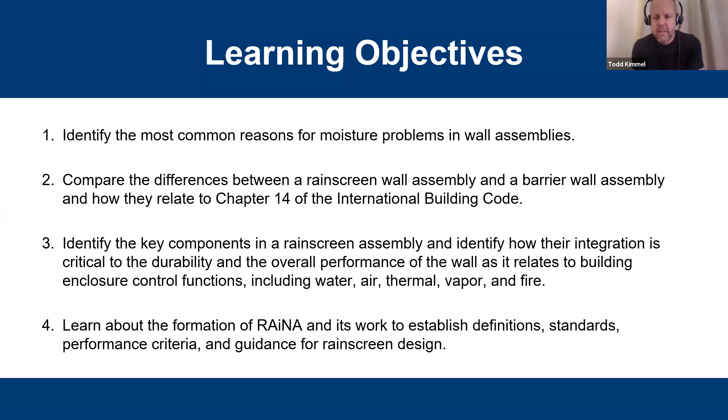So, just quickly, here's the course description. The hope and the goal here is to identify some of the common reasons for moisture issues within our wall assemblies, look at what's currently in the code as it relates to the various elements and components that we have to consider within rainscreen walls, and look at the overall performance of walls as it relates to the various functions from air, water, vapor, thermal, and fire. And then, learn a little bit more about the new association out there, how we can support your efforts and how it might make sense to align going forward.

So we'll start with the building enclosure. We'll look at all the things that we need to consider when it comes to rainscreen, which, as we hopefully know, is more than just a paneling product. There's a lot of other considerations that we need to take in—why it makes sense that the rainscreen group needs to come together to represent this kind of new gold standard within the enclosure environment, and how the Rainscreen Association works.

So I am going to ask the Chief Operating Officer for RAiNA, Laverne Dalgleish, I believe, is in attendance today, and he should be able to assist with answering any questions that you have throughout the course of the presentation. So feel free to type questions within the chat box. If we're unable to answer any of those particular questions, I'll certainly be able to field them at the end of today's program, and we'll hopefully get what you need before the end.

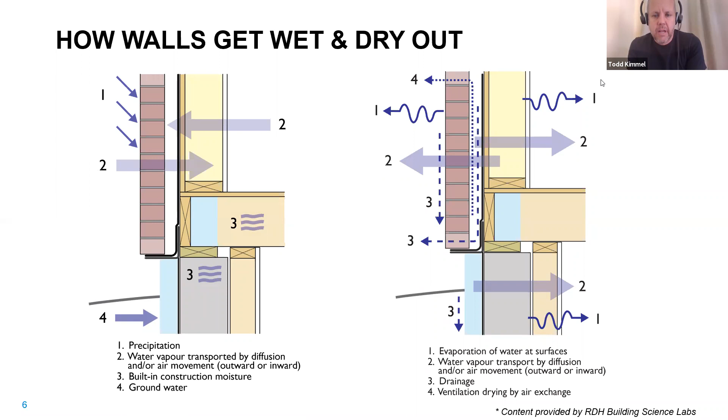So that's not always used in all assemblies. We'll talk about how that certainly integrates within the rainscreen wall.

When it comes to managing liquid water in our walls, we have 3 approaches for that in general. First, we'll start with what we would call a storage or a mass wall. These are built walls where the structure itself is built out of fairly resilient materials when it comes to moisture, whether that's rubble or masonry or sometimes composite layered assemblies.

These types of materials are meant to be that water break right on the surface. Sometimes they can take on water, but it wouldn't be to the detriment of those materials, and they will eventually release that water without compromise to the integrity of the building. We don't see a tremendous amount of storage or mass walls now that we have energy code requirements—certain assemblies are moving away from that, but this is certainly a way to manage liquid water within our built environment.

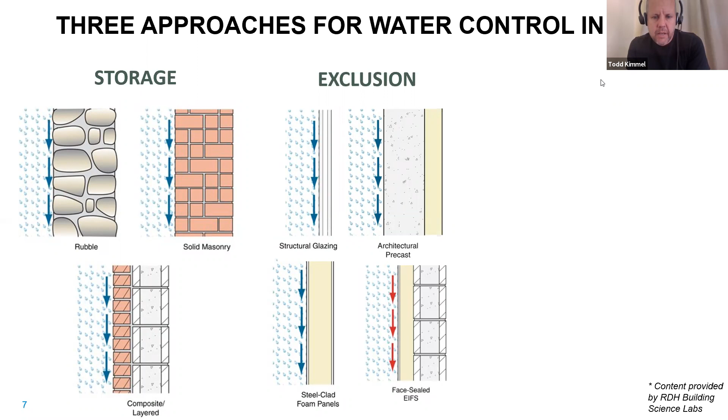We also have exclusion walls. Not too different from that mass wall, but these types of walls are not taking on moisture, and they're really meant to be perfect. They're navigating the water on the exterior side, and they have a primary location where that liquid water can hit and drain to the bottom. They're not integrating drainage planes intentionally behind those assemblies, and water is dealt with right on the surface. That's a critical component within the detailing, design and construction of these exclusion systems.

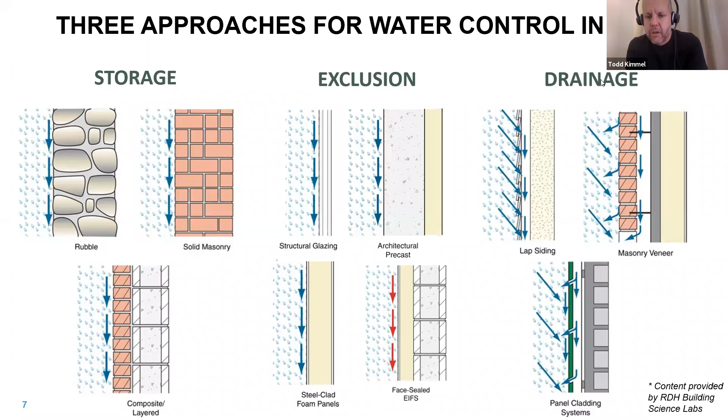Last but not least, you have what we would call a drainage wall. With these, it's not that you don't have intent of handling water on the surface of the cladding—you certainly do—but there's incorporated and intentional drainage paths within the wall itself to help navigate and manage the liquid water that will likely make its way behind the cladding. So this is not relying on the perfection of the exterior cladding, but helping to promote other tactics within the assembly to drain and evacuate that moisture. You can see a few different examples here, from masonry veneer to lap siding to many of the panel cladding systems that we see installed within rainscreen walls today.

So the hierarchy here in terms of types of walls—we're going to start, as we look at this chart on the left-hand side, with what we would call a perfect barrier system, which really aligns with that exclusion wall we showed on the prior slide. We call it perfect barrier because these systems do need to be perfect, whether they're face-sealed systems or, as in an insulated metal panel, a concealed barrier dealing with sealants on the exterior face of the cladding to try to prevent moisture from ever entering the assembly. It's not meant to navigate any breaches. So if there are imperfections or issues, it becomes more challenging to control the water that gets behind that essential barrier.

Then we'll talk about the imperfect barrier on the right-hand side—not to confuse people into thinking we're promoting something imperfect, but the intent here is that we know it's hard to make things perfect. So these assemblies are meant to recognize that moisture will get behind that first layer of defense, and there are intentional mechanisms to manage that moisture once it gets behind it.

Again, with mass storage walls, that's handled through the actual materials themselves—like brick, masonry, or rubble, or mass CMU-type walls that might be exposed. They can get wet, but as you have heat flow across those assemblies, that water can diffuse out without much compromise to the integrity of the wall. But more often than not, and what we'll be talking about a lot today, are these drained or screened walls, where you might have closed joints or open joint claddings, but you're integrating cavities of certain parameters to navigate that moisture behind the cladding, along with specific water-resistance components. That breaks down into a few categories.

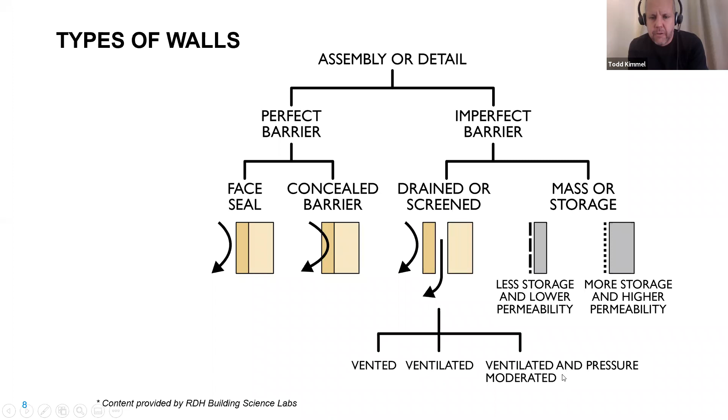You'll see vented, ventilated, and ventilated and pressure-moderated. We'll talk about those differences as we go forward in today's presentation.

The Rainscreen Association in North America has developed a current definition through the definition committee, and I'll read it verbatim so people are familiar with what we mean by rainscreen: an assembly applied to an exterior wall which consists of, at a minimum, an outer layer, an inner layer, and a cavity between them, sufficient for the passive removal of both liquid water and water vapor.

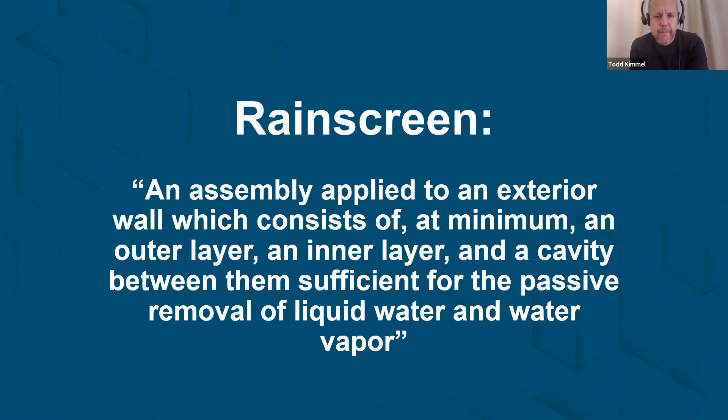As we look at a diagram here—on the left a plan section, and on the right the actual vertical section—number one here would be identified as our outer layer, which could be the cladding. Number two is our inner layer, represented here by a water-resistive barrier over the sheathing. Number three is this air cavity, which is a space in between that outer layer and the inner layer.

And then that space has to be sufficient for both the passive removal of liquid water, which you see here in blue, and water vapor, which you see here as the dotted line. So that's kind of what we're talking about when we discuss rainscreen.

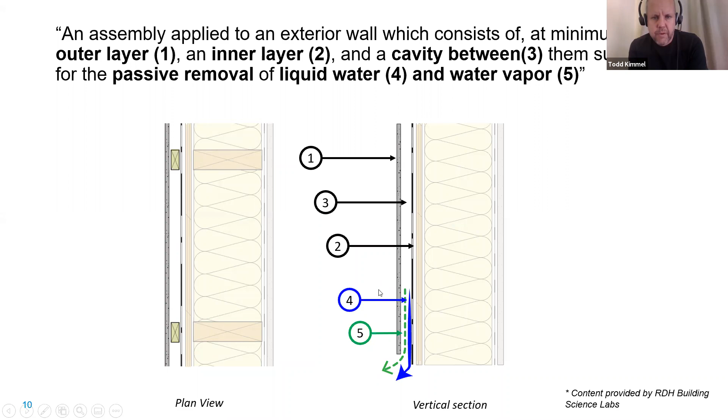There's different ways to do this. In fact, almost any cladding and backup wall separated by a cavity that is drained and vented or ventilated would qualify by this definition. So again, this is not a product, material, or building type specific assembly. It can be applied to a variety of types of buildings and can integrate lots of different sorts of materials.

Just as some examples here, starting on the left, we might be looking at residential construction, or maybe multifamily wood frame construction, where again you'll have, let's say, a fiber cement cladding. You'll have furring strips to help provide that cavity space, and a water-resistant barrier up against that sheathing. That's a very common assembly here that we see in North America.

When we move to more commercial construction types that are steel framed or metal framed walls, not too different from what we see on the residential end, but you'll notice one difference is now we have exterior insulation thrown into the mix. We'll still look at that inner layer really serving as that water resistive barrier. You still have your cavity space between the insulation and the cladding itself. And then that cladding can be all sorts of different types of materials, from ACM to steel plate, aluminum plate, to other types of composite materials that would service in that position.

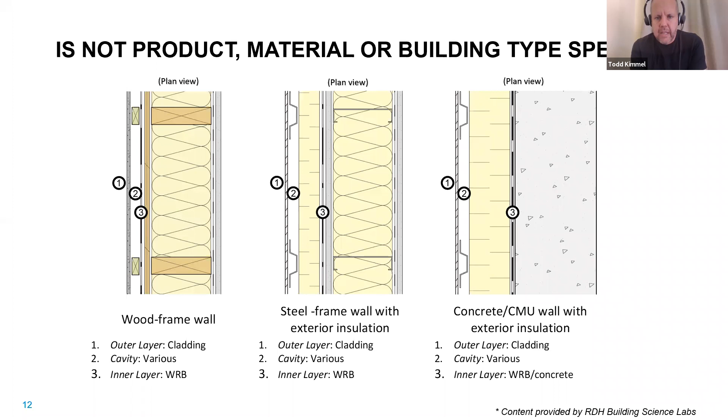And then last but not least, we're seeing here concrete or CMU walls with exterior insulation as well. And really the difference here is now all the insulation in this wall is being pushed to the exterior side, but the other parameters remain the same. The three primary components are still recognized as far as an outer layer, an inner layer, and then a cavity that's going to help promote the passive removal of that liquid water as well as water vapor.

From the continuum side of our walls, this was generated through the technical committee at RAiNA and supported through RDH consultants. So this is the content that we're showcasing here, which really gives you, when we look at framed walls, how are the differences out there? Where do we start to see rainscreen walls come into this continuum?

As we start on the left-hand side, which is categorically the non-rainscreen walls, we'll start far on the left with face sealed systems, where you have a tighter profiled, let's say, metal cladding, and there's no specific backup for drainage. It's meant to be sealed at the surface. It's not meant to permit or allow water from getting behind that cladding.

That can also be done with some concealed barriers, where again it's basically a sealed system, and there's no specific detailing for drainage or flashings within these systems itself. So there is some level of water control, but it's not really intentional from a drainage or a ventilation space side of it. There are some assemblies that will include minimum levels of drainage, and you can see that with flat cladding with maybe a textured house wrap. But the intent there with the drainage and venting might not be as you would see with the rainscreen wall.

As we move to the right-hand side of this chart, now we're looking at some levels of intentional venting, whether that venting is incorporated through entangled mesh or through maybe a dimple sheet type product behind the cladding itself, where we might not have a release at the top of the system, but there's certainly a level of intention to the drainage at the bottom, and certainly getting venting there to release some of the vapor as well as the liquid water.

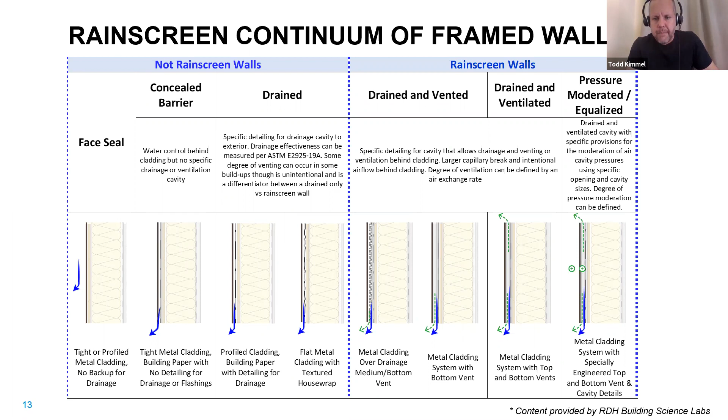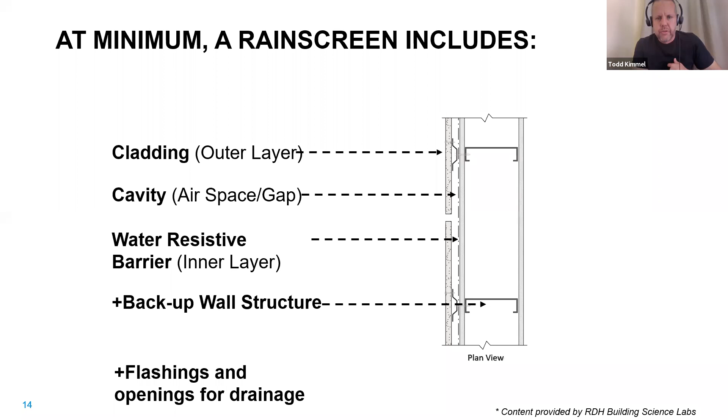So that is certainly another component that would fit within the rainscreen wall continuum. At a minimum, rainscreen includes an outer layer, cavity, a water resistive barrier which serves as your inner layer, and then your structural backup wall. It's important to note that flashings and the openings for drainage are integral to the performance of these assemblies as well.

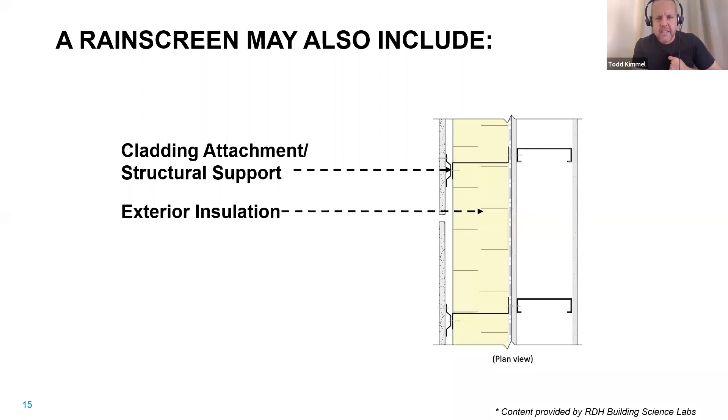But we can't forget there's other things included here. We mentioned that was at a minimum, but we commonly also see cladding support, to support those claddings, since they don't always have integral furring strips or mechanisms to create that cavity space. So in terms of attaching those claddings back to the structure, we have to recognize that. We also have exterior insulation, which the IECC is now requiring in I think all jurisdictions, so we have to recognize the layer of continuous exterior insulation that needs to be integral to these assemblies.

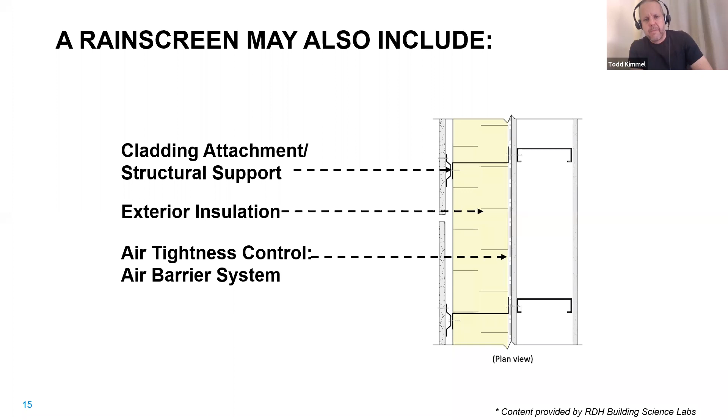Oftentimes, while we're going to have that water resistive barrier on the sheathing, it's not necessary that it needs to be your airtight layer, but oftentimes we see it designed and implemented as an airtight layer. We'll talk more about that in the future, but it should be recognized that just because you have a water resistive barrier, it doesn't necessarily mean it's meant to serve as an air barrier and meant to be installed airtight.

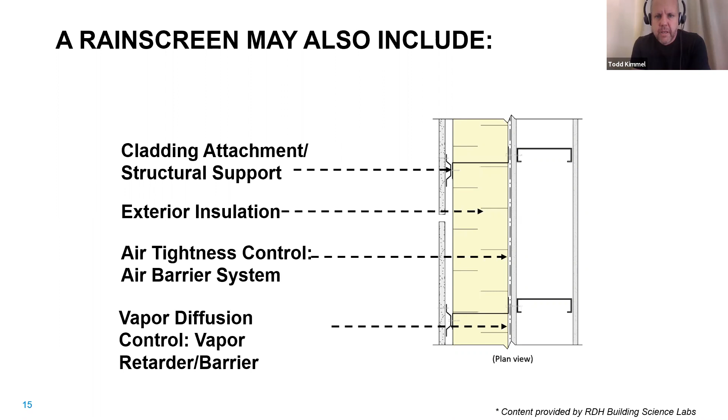And then with many of these assemblies, that same membrane can also provide some level of vapor control. It could be completely vapor impermeable, serving as a class 1 vapor retarder, or maybe it's vapor permeable with intent for its permeance, but nevertheless it's controlling some level of vapor diffusion within the assembly. And so that is also part of a rainscreen wall as it's designed.

Just going through those first initial slides, I think we can all recognize that there's a lot to consider with a rainscreen wall. So we're going to go through the various components within a rainscreen to identify what they are, identify the considerations, identify how maybe there's unique considerations for each one of these components, but then there's also shared considerations within how the assembly works.

We're going to start with claddings, probably fairly simplistic. We're probably familiar with a lot of claddings that promote themselves as rain screens in and of themselves, but obviously they need to be part of a system. Really almost any material can be used as part of a rain screen wall and used as a rain screen cladding. Some very common examples we'd see in the commercial market: I mentioned already ACM, we also see high pressure laminates, fiber cement panels, concrete, porcelains, stones, terracottas, brick, maybe wood-based products, and I'm sure some other composites out there that can be used as compact panels within a rain screen assembly.

Some of the considerations you need to make with these claddings is their exterior finish, making sure that they are water shedding, that they're non-absorptive for the most part, and that they're going to be unprotected from the environment. So from a durability standpoint, they need to be UV resistant, they need to be able to stand the test of time based on what the expectations are for the construction that's being assembled.

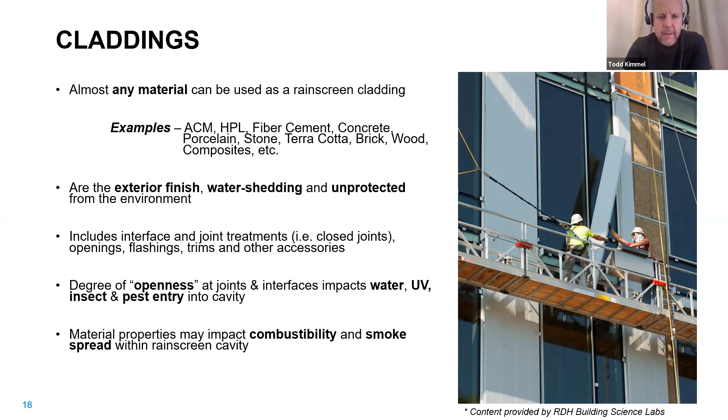This is not meant to be an exhaustive list of considerations for claddings, but from the unique side of it, specifiers or design professionals will consider what colors are offered, what sizes, the durability and UV resistance, and whether we need to provide edge treatment if we're cutting these panels, and how to navigate that.

But there are a lot of shared considerations that are system specific and tie into the other components of rainscreen. For instance, deflection criteria—each panel might have a different level of deflection requirements that dictate how frequently you need to attach claddings back to the wall, telling you how often you need an extrusion to support the cladding. If you don't abide by that, you might get waviness or unintentional bends within the panels, and that varies by cladding type.

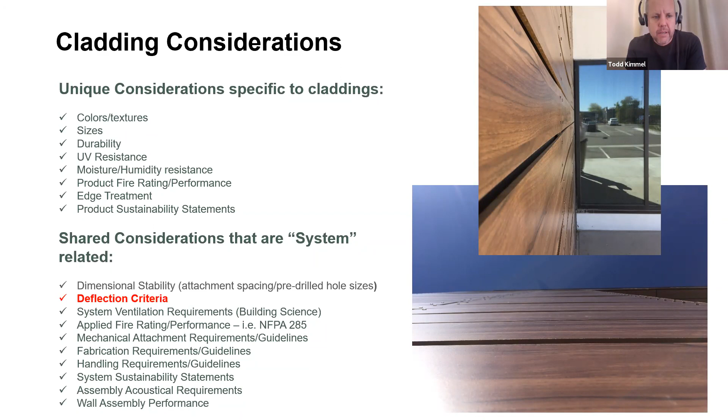The cavity shouldn't be overlooked—the airspace or gap is critical within these assemblies. At its bare minimum, it inhibits capillary action to prevent water that hits the surface from transferring from the outer to the inner surface of the wall or rain screen, allowing for drainage. The airflow within that assembly also helps evacuate water vapor that migrates into or tries to get out of the wall, safely removing it. This air cavity can also impact fire and smoke propagation within walls.

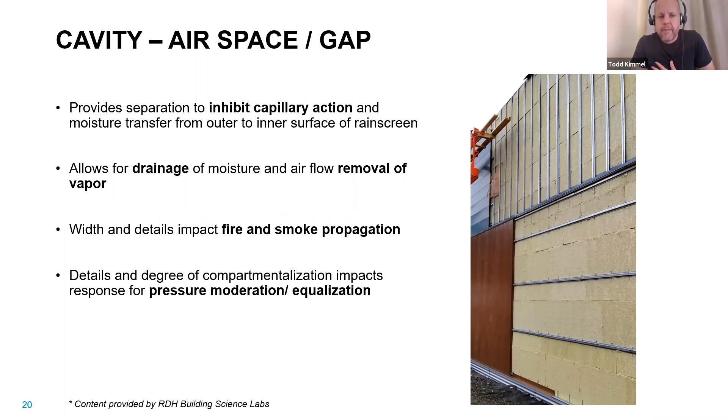We may be familiar with NFPA 285, a fire assembly test commonly used in rain screen walls, or exterior walls generally. We should recognize that cavities or open spaces can impact both fire propagation and smoke propagation, so considerations need to be made for that gap. And if you're doing pressure moderated or pressure equalized systems where you want to compartmentalize the cavity behind the claddings, considerations need to be made for that cavity specific to those wall types.

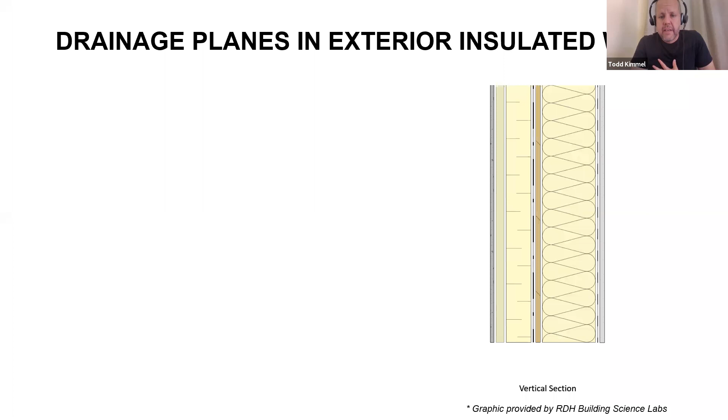These air cavities contribute to the drainage planes within exterior insulated walls. But when we talk about exterior insulated walls, it's important to note that, unlike a perfect wall or perfect barrier system, rain screens have multiple lines of drainage planes, which contribute to more optimum performance and more control over liquid water.

One drainage plane is at the face of the cladding—when water hits the wall, there's a drainage plane right at the cladding side. If you have open joints, or even closed joints where water finds its way behind the panel, the back of the cladding also serves as a proper drainage plane. When you have exterior insulation, which could be various rigid forms of insulation, those insulations are typically designed to be water shedding within these walls.

So the face of that insulation also serves as a drainage plane—if water makes its way behind the cladding, jumps the cavity, and gets to the face of the insulation, you have a third line of drainage there. And we can't overlook that we still have a water resistive barrier, typically placed directly behind the insulation over the sheathing, acting as a fourth and final line of defense for moisture control. There's a lot of redundancy built within these commercial rain screen walls that helps contribute to performance.

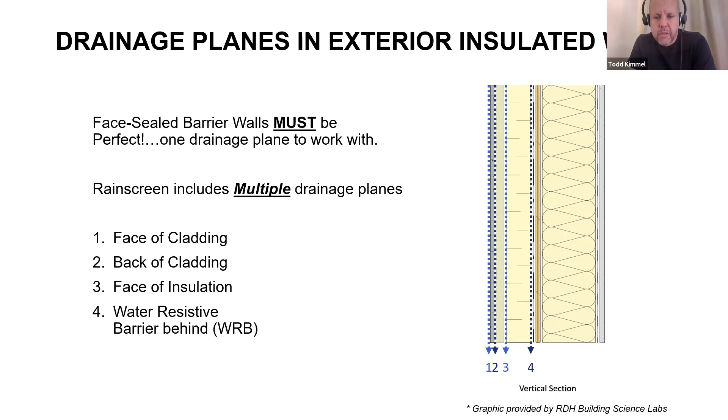Also in line with the cavity discussion, I mentioned vents, venting, and ventilation—it's important to note there are different ways to achieve that within a rain screen. We could look at systems that purely have venting, meaning there's only an opening at the bottom of these systems to allow for drainage and to allow for low flow air rates within these walls.

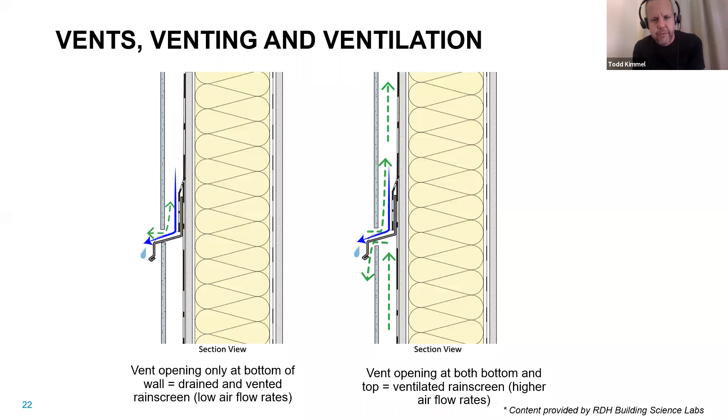But when we talk about ventilation, and looking at the promotion of air exchange within the walls, now what we're seeing is that this flashing component in between the horizontal panel joint shows there's intent to allow for an airspace at the top of the cladding. This is now allowing for that air exchange. This convection, kind of chimney effect, allows for a higher airflow rate within these walls to help quickly evacuate any moisture or moisture vapor within these assemblies.

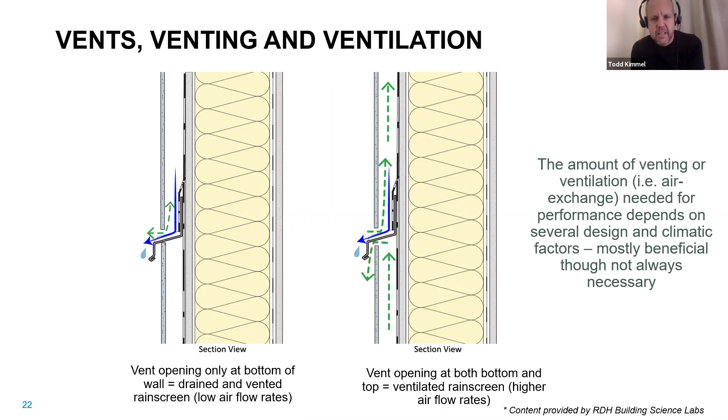So that's kind of a primary difference between what we would call vented versus ventilated. The amount of venting or ventilation, and its performance, depends on several climatic factors. And while it can be beneficial and oftentimes is beneficial within these walls, it's not always necessarily the case.

All right, so another component within the assembly is obviously the water resistive barrier. This oftentimes makes up the inner layer of the rain screen, located inboard of the cavity itself. For many of those out there that have been involved in these walls, you're probably fairly familiar with the products used as your water resistive barrier.

But we also see a lot of self-adhered membranes, things that are fully sticky to the wall. We see fluid applied products that are troweled on and taped or seamed, with different types of sealants at the joints. And so those also serve as water resistive barriers.

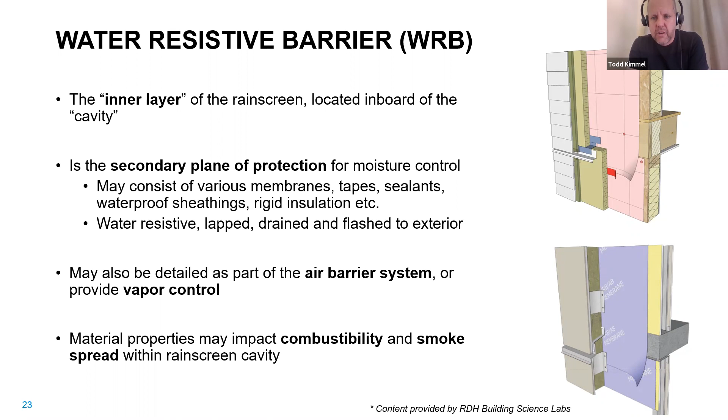It's usually not a single product. These WRBs, you have to integrate those components. You have to follow the proper lapping, the taping, the sealing, which make it part of that system. And again, they can be part of an air barrier system and obviously provide some level of vapor control, but that should be done as intent through the design and construction process. And many of these products will have an impact on the combustibility and the smoke spread within the rainscreen cavity, so considerations as a system need to be made by the integration of these products.

And so in general, there's always going to be some unique considerations for water resistive barriers, from durability, UV resistance, dimensional stability in terms of movement. They might have different sorts of fire requirements. They might need to meet specific air tightness requirements as a material or even as a system.

When we talk about open joint rainscreen, certainly the UV exposure, long-term UV exposure is paramount to the decision-making process. And then, of course, there's shared considerations that are going to be aligned with the rainscreen as a whole. I'm not going to go through all of them on the list here.

But one of the key ones is penetrations. We talk about a water resistive barrier or even an air barrier as part of this assembly, but you've got to attach cladding to it. So you've got to put a puncture within these membranes to attach these structural components to the wall, or these cladding components to the wall. So how do you navigate those penetrations? How do those systems to attach the cladding integrate with these membranes and maintain that necessary water control or air tightness control within these walls? And so as an industry, we have to recognize that and how to do that effectively.

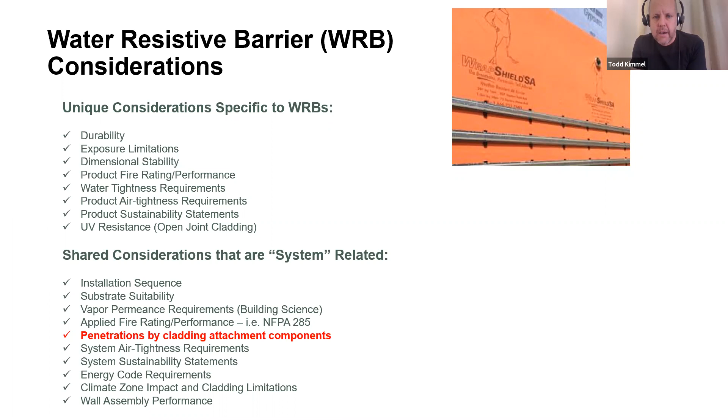So here are some more details of what that would look like.

All right, so moving on from membranes, now we're talking about cladding attachments. Again, the cladding won't attach itself for the most part. Sometimes that is the case, but for the most part in a lot of these commercial systems, we need mechanisms to support that cladding off of the structure to promote not only that ventilation and drainage cavity, but oftentimes to incorporate exterior insulation, which again is becoming much more prevalent. So we're looking at plan sections of different ways and mechanisms to do that.

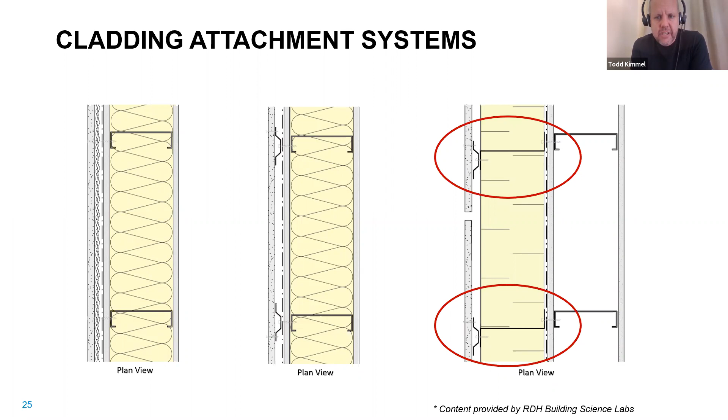And then on the right you've got some exterior insulation. As our energy codes are shifting, we have to be very careful about how much of that cladding component is breaching that insulation and impacting the thermal performance of those walls.

So we now know that we want to minimize the thermal bridge from a rail or a clip that's going through that insulation. There's a lot of new technologies out there that need to be considered to help carry that cladding flush to the face of the insulation without creating a significant linear or point thermal bridge through that insulation.

So this is just kind of an array of systems that we see commonly used out there to help minimize that thermal bridging. Different types of clip and rail solutions, some components made out of metal, some out of fiberglass. Fiberglass being less conductive than metal can help contribute to higher thermal effectiveness of these assemblies.

Sometimes we're now seeing rigid insulations being used that have a compressive strength to support the cladding flush off the insulation without using any clips or rails, but maybe just fasteners that can penetrate the insulation and again reduce that thermal bridging down to point bridges, which you can see here in the lower right.

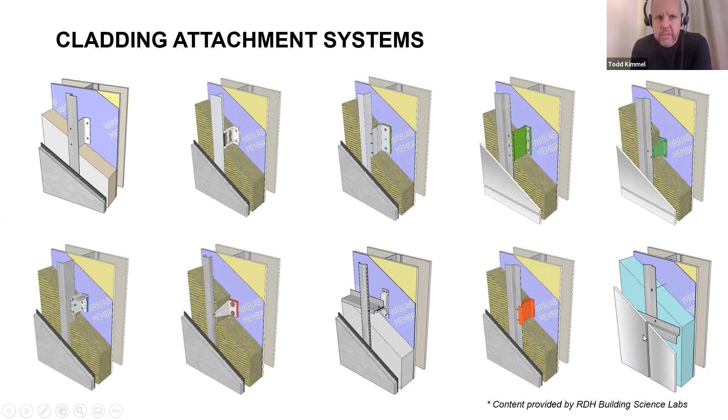So these are all considerations that we need to make for these systems. For these types of extrusions and component systems, obviously durability is key, how they contribute to fire performance ratings, how they're contributing to the sustainable built environment overall.

A lot of the times, this is the peanut butter that connects the wall to the cladding. There are a lot of system-related impacts here, from structural integrity to dimensional stability. How do we make sure we have a flush surface to maintain the extrusion system for the cladding?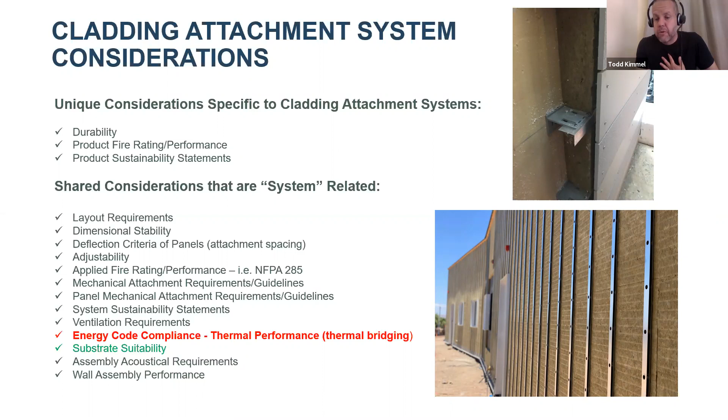A big part of this, if not to emphasize enough, is energy code compliance. How are these systems navigating the thermal bridging within these walls to optimize performance and reduce even condensation or moisture within the walls by eliminating that thermal bridging?

And of course, exterior insulation, we've referenced it a lot already, but this is becoming much more paramount in these wall assemblies to provide thermal control, to meet the energy code requirements, oftentimes to navigate condensation control within walls, to minimize the impact of dew point within your wall assemblies, or to place it in the right location. Sometimes these products are chosen for fire protection as well.

Considerations that need to be made are the air and vapor permeance of these materials, depending on the walls and where you're building them. We might want to ensure that we're optimizing vapor drive outwards, and we might want to make sure we can tape these products if they're serving as our air barriers.

If these products are in these assemblies and exposed to water, UV, or the environment, how well can they navigate that, and how do we integrate water resistance within these assemblies using exterior insulation? And of course, we have to have fire considerations because there will be some level of combustion and smoke development created by these parts and pieces within these walls.

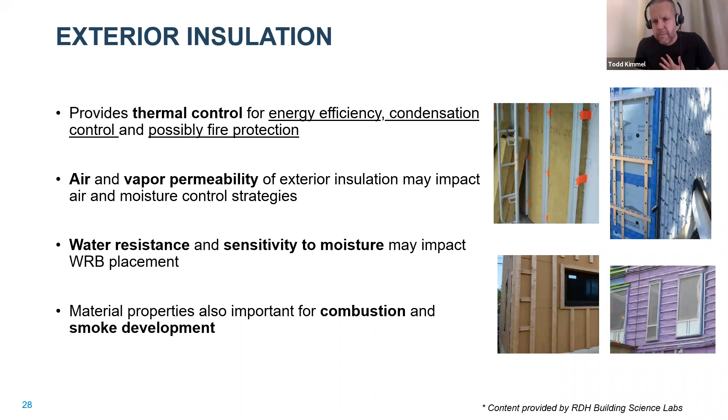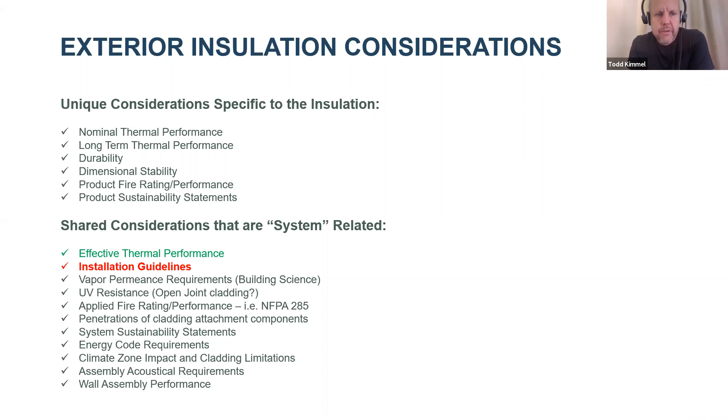So again, lots of things to uniquely consider with these products, from nominal R-value to long-term R-value to durability and resilience within these walls. A lot of shared considerations within the assemblies.

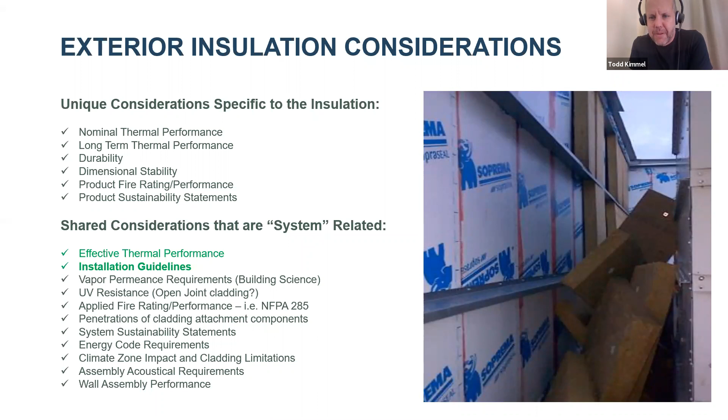Certainly, we want to make sure that we're attaching these products within these walls so that they stay there effectively. We're looking at a photo here on the right, where maybe the adhesives used were not optimum for these products, and for thermal insulation to be effective, it needs to sit flush against the wall. So, a lot of considerations need to be made.

And it doesn't stop with the assembly. Design and construction professionals play a role in this, and there are considerations they need to make, from the aesthetics—they're the ones choosing the colors, the textures, the profiles, the depth of these products, the grid and the patterns.

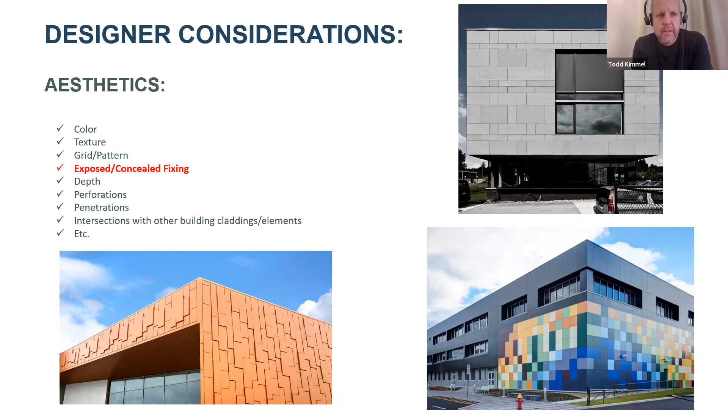Are we using concealed fixings that might add certain components within these rain screens? Can we use exposed fixing that might create some levels of simplification? Are there perforations or penetrations that need to be integrated that require more onus on water control within the walls? We have to think about that.

Designers, whether architects or more often engineers, have to recognize the structural loads being applied to the wall through these systems, whether wind or seismic, any sort of dead or live loads—those things need to be considered. Environmental loads too, anything from wind loads to driving rain, snow, ice, maybe fire—those types of things need to be part of this as well.

And then certainly the combustion loads that we've referenced throughout, recognizing how the fire testing requirements can dictate some of the product decisions.

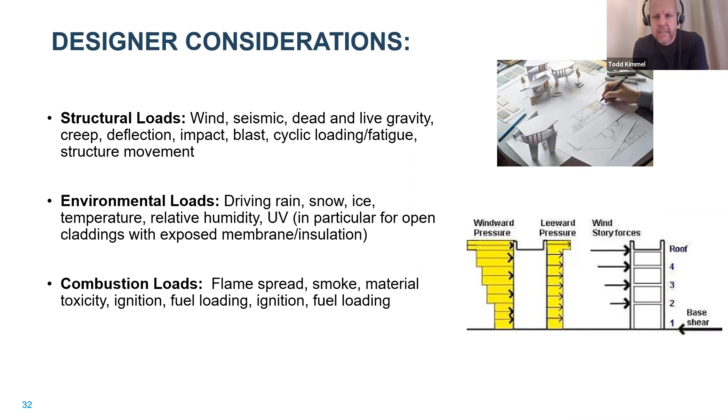There are a bunch of test standards out there, ranging across all sorts of different products implemented into these assemblies, and even system related tests. This is not meant to be an exhaustive list of reference standards, but you can see there are a lot of standards across these various products that need to come into consideration.

Currently there are a couple of AAMA tests on the market today that specifically address rain screen. There's the AAMA 508, which is more of a classification method for pressure equalized and moderated rain screen assemblies. There's also AAMA 509, which addresses drained and back ventilated rain screens.

But the AAMA 509 is more of a classification method—it is not a pass or fail test. So it doesn't tell you whether this is a good design or a bad design. It lets you know this test or assembly allows this much water behind the cladding, but also allows a significant amount of ventilation. It doesn't tell you if that's right, wrong, or indifferent. So there's still a little bit of work to be done on addressing what makes a rain screen successful versus not successful, and how we measure that.

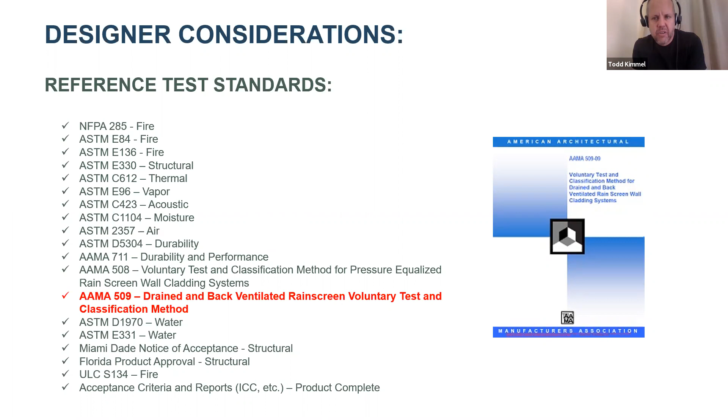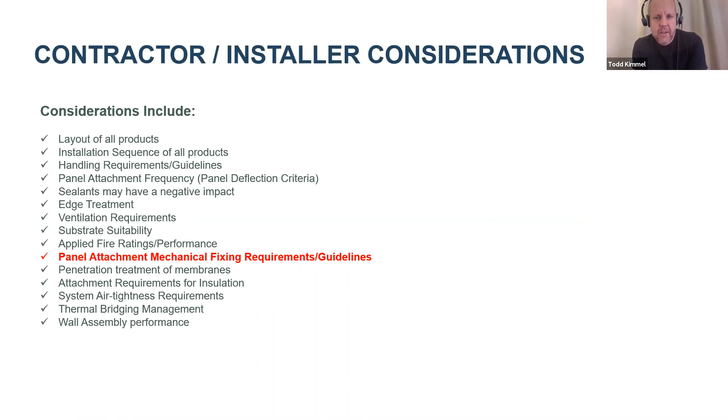Contractors obviously are part of this as well. We can design buildings as best we can, implement all the right products and get all the testing considerations down right, but at the end of the day it needs to be installed per the right guidelines. There's a lot of considerations that are all system related here, from the contractor's point of view.

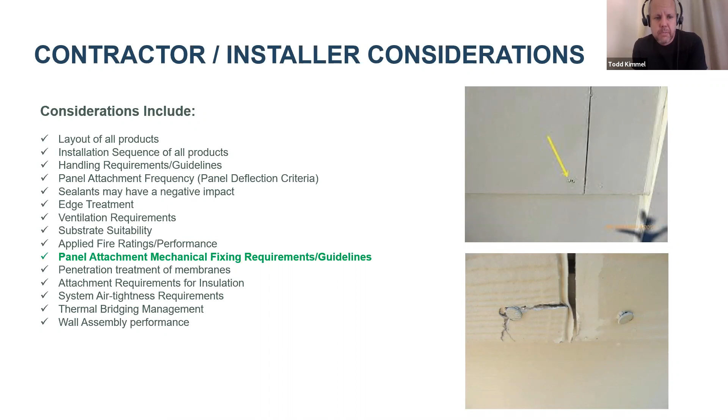One thing that shouldn't be overlooked is panel movement, understanding that a lot of these claddings have some level of expansion and contraction, and we need to account for that within the fixed or sliding holes in these systems to prevent any buckling or issues. This is oftentimes overlooked, but there's a number of things contractors need to get right to understand how these products integrate and work effectively.

Now we're going to move on to the model codes, to understand how rainscreen is currently represented or underrepresented within the IBC. Chapter 14 talks about exterior walls, and you'll see there are a number of prescriptive requirements within chapter 14 for a variety of products. I think the intent is that there are a lot of prescriptive requirements for a lot of different materials, but in general we don't adhere to them.

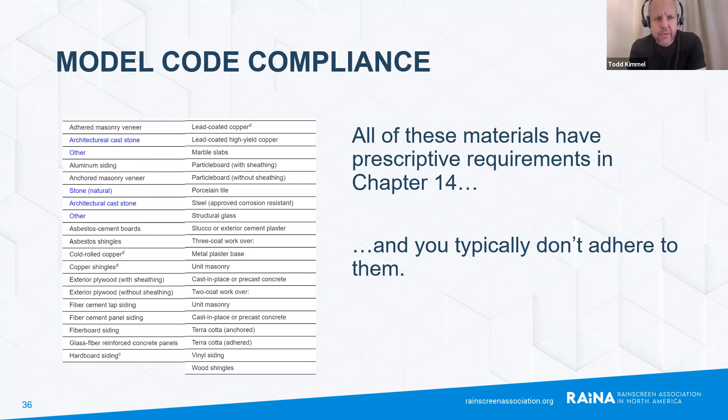There are also performance requirements we can move to. Chapter 14 will reference things like fire standards or structural performance requirements—specific fire tests and prescriptive methods to use those materials, as I mentioned. But chapter 14 doesn't reference energy performance of assemblies.

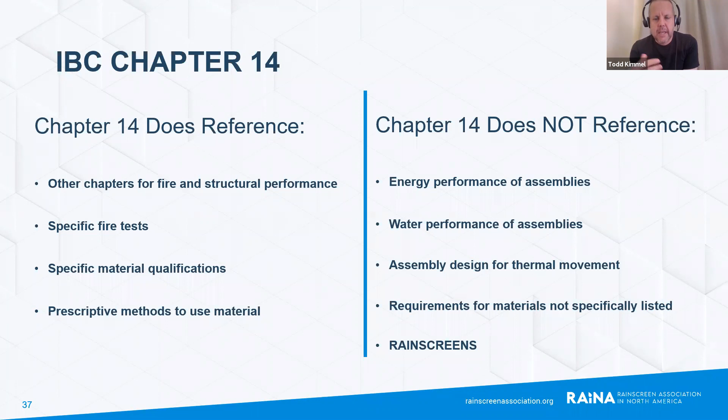This is again our exterior wall section. It doesn't give specific requirements around water performance of assemblies, doesn't reference the thermal movement that needs to be accommodated within these walls, and there are a lot of materials currently being used for rainscreen whose material requirements are not specifically listed. Most importantly, chapter 14 does not have any current reference to the term rainscreen—we might see things like MCM or HPL listed, but it doesn't get into these other specifics.

Again, when it comes to prescriptive versus performance, as I mentioned a couple of slides ago, there are a lot of prescriptive requirements, but oftentimes we go the performance route—that's how we adopt and get different types of products within our buildings that might not be listed in the IBC.

We rely on these key performance characteristics. As an example, instead of having a prescriptive R value within our walls, we'll calculate the U value of the assembly. And that permits us to get in.

Oftentimes there are tolerances for the use of combustible materials. It's not going to tell you specifically what you can and can't use, but you're going to have to run an NFPA 285 tested assembly, and that test or the evaluation reports around those tests are often used to show compliance.

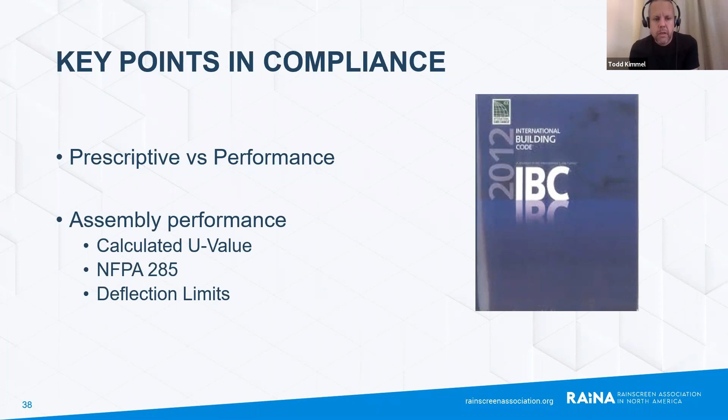Oftentimes the same is true with deflection limits, which vary based on product. So right now there are ways we work from the performance side that allow us to get into our buildings, and that's where we see rainscreens really being the route things are going.

But if we take it back to that prescriptive level, if we're just building to the prescriptive requirements, they could be compliant walls, but they still might leak. You might still see cracking and bowing of panels. You might have some level of vapor drive issues dealing with condensation.

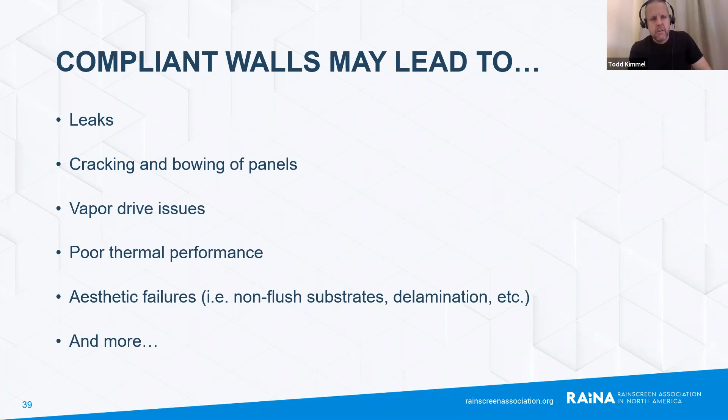You might end up having poor thermal performance with lots of thermal bridging that's not specifically addressed within the IBC as it currently stands. These things can lead to aesthetic failures, such as delamination, unflushed substrates, et cetera, and other things we need to consider. So it's not perfect as it stands, and I think there needs to be a more cohesive approach.

So then the question is, why do we need a Rainscreen Association North America? I think it's really to address all of those concerns. We need to come together.

I don't know if any of you find this image appetizing or not. I'm not trying to entice you to find it appetizing. I think the intent here is that some really tasty things, or things we like, are presented in layers, and the layers are critical for the end flavor, and the location is often really critical as well.

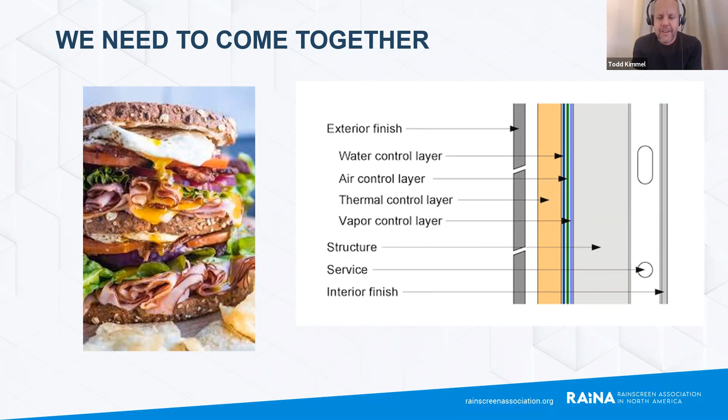And so it's not too different with Rainscreen. We're seeing an image here of what Dr. Lstiburek likes to call the perfect wall, and it's kind of represented here in the Rainscreen. You can see the various control layers that need to be integrated, as we've been mentioning throughout. There are a lot of these parts and pieces that need to come together and be installed effectively in order for this to work efficiently.

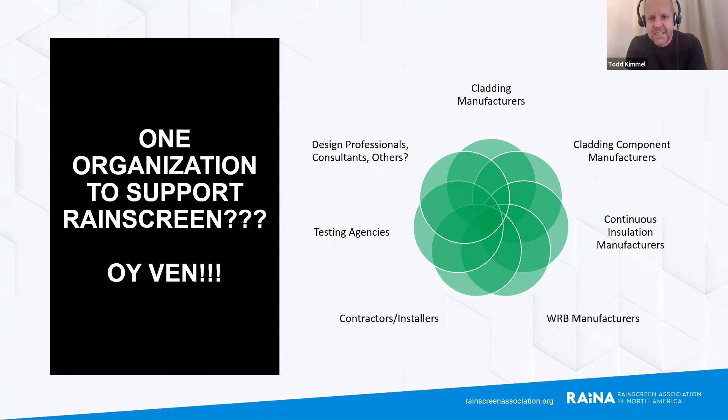So then we can say, well, one organization to support Rainscreen - that could be challenging. We've got lots of different groups of companies involved, from the manufacturing end to the design professionals to the consultants, to the contractors, to the testing agencies. So it's not easy.

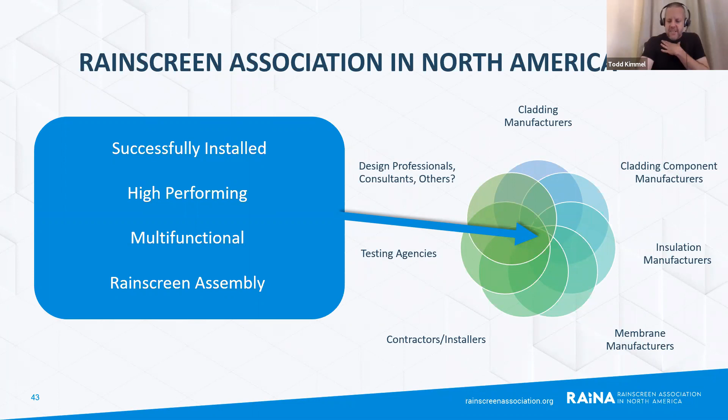This is a very complex Venn diagram, but really the successfully installed, high-performing, multifunctional Rainscreen assembly is going to be located at the dead center of this Venn diagram.

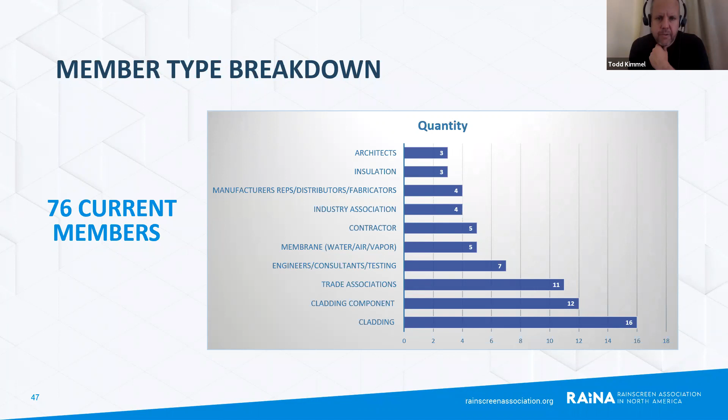This is as of last year in terms of the member type breakdown, but it gives you a sense of the types of companies involved. The majority of membership right now consists of cladding manufacturers or component and attachment manufacturers, as you see here at the bottom. We have a number of trade associations, from sheet metal workers to carpenters and the like. We have some consultants, which is really critical for bringing these parts and pieces together. But we also have membrane manufacturers, different industry associations, insulation manufacturers, and design professionals. So it is certainly a mix of folks.

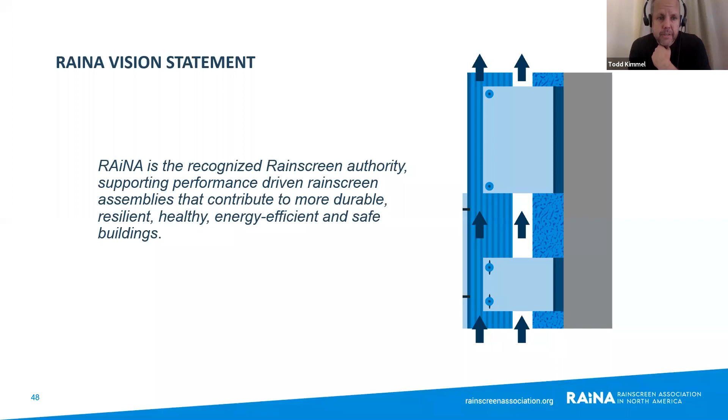The RAiNA vision statement, as it currently stands, is: RAiNA is the recognized rainscreen authority, supporting performance-driven rainscreen assemblies that contribute to more durable, resilient, healthy, energy efficient, and safe buildings. What we value most is the integration of this expertise - bringing all these smart people and smart companies together to really focus on best practice.

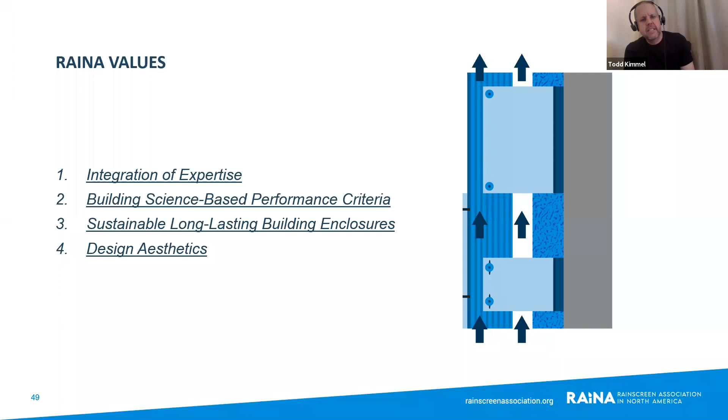That best practice will be based on building science performance criteria. So this is not any one person saying, 'this is how we've done it, so this makes the most sense.' This is going to integrate proper testing to really showcase that the proof is in the pudding, and we're looking to encourage sustainable, long-lasting building enclosures through this process while maintaining aesthetics.

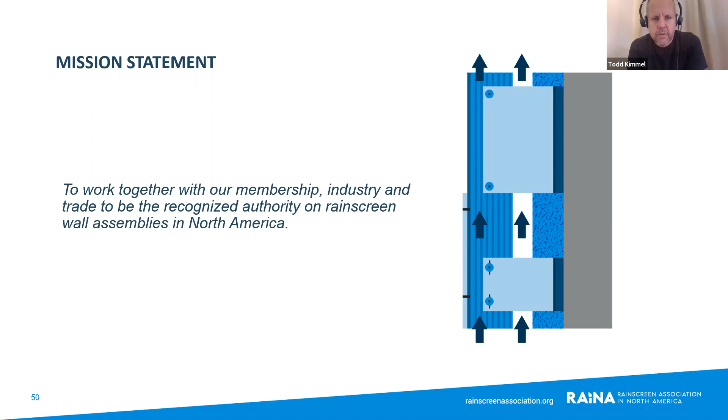Our mission statement is to work together with not only our membership but the industry and the trade to be the recognized authority on rainscreen wall assemblies in North America. As you can imagine, there are a lot of associations out there, like Metal Construction Association, that's done a tremendous amount of work and has a lot of expertise in this realm.

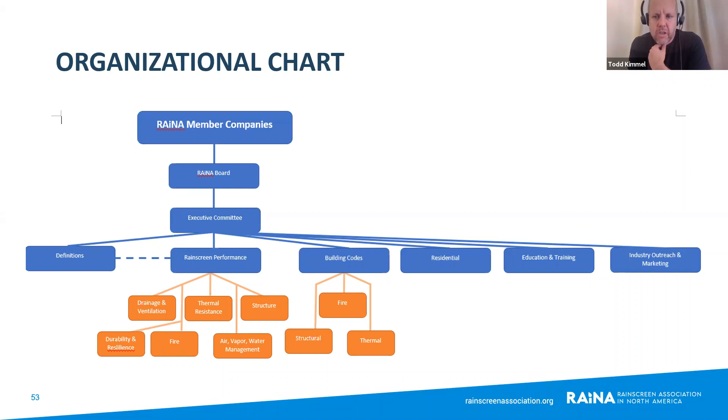As it currently stands, we have 76 member companies affiliated with the association. 48 of those companies are active members in terms of participating within our standing committees. This gives you a sense of where that activity is highest—our rainscreen performance technical committee sees the most membership there. But all of these members have been very active.

As of the end of last year—this was from October last year—we had 78 meetings within the calendar year for an association that really didn't get going until June of last year. So in six months, they had over 78 meetings, a tremendous amount of hours put into this association to really launch and get things going.

The definitions committee, dealing with semantics, has been one of the most interesting initiatives that we've had. One of their highlights for the first year was coming to an agreement on the definition of rainscreen itself—making sure we identify it as one word and not two, which can often be confusing. They've worked closely with the AIA, who has a similar definitions committee, to help align the focus here, and supported some of the other committees within the association to recognize this terminology. But there's a whole host of terms they're working on as we move into 2021.